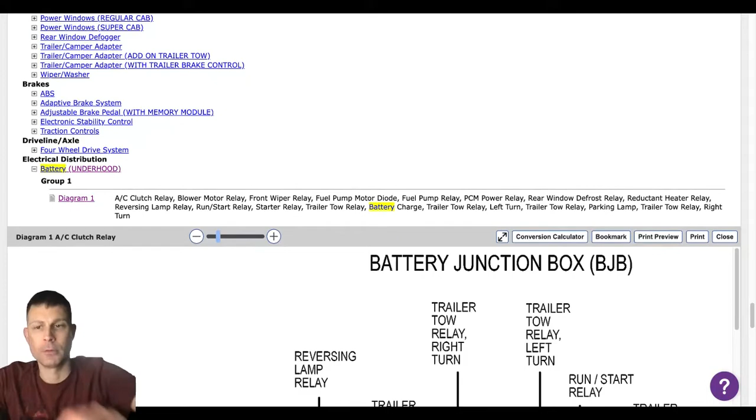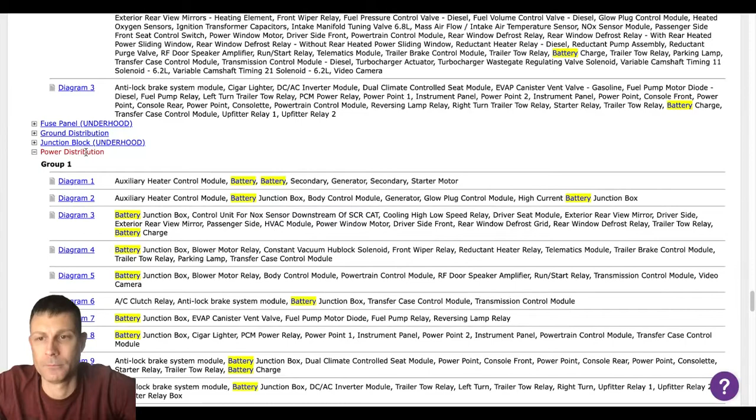This is a 2015 Ford F550 diesel turbocharged bus, and we just purchased new batteries for it.

All our dash lights are out. The horn works, and we've got the fuse box cover off, but we have no idea where to start with what to do at this point. So I wondered if you could give me some guidance, please.

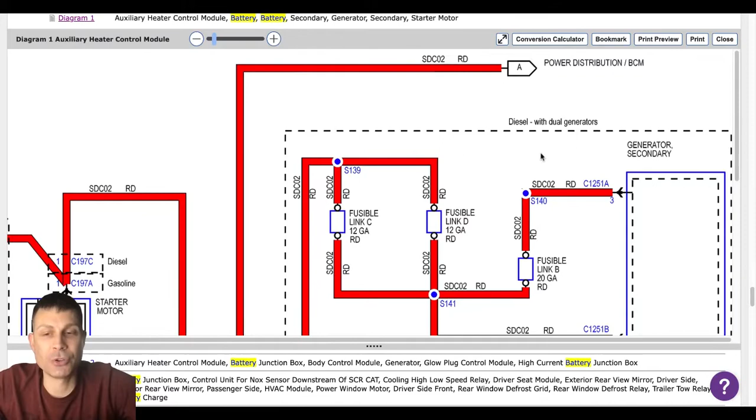Yeah, you bet, I'm definitely trying my best here. So the batteries are new, and you can access the fuses right now, correct?

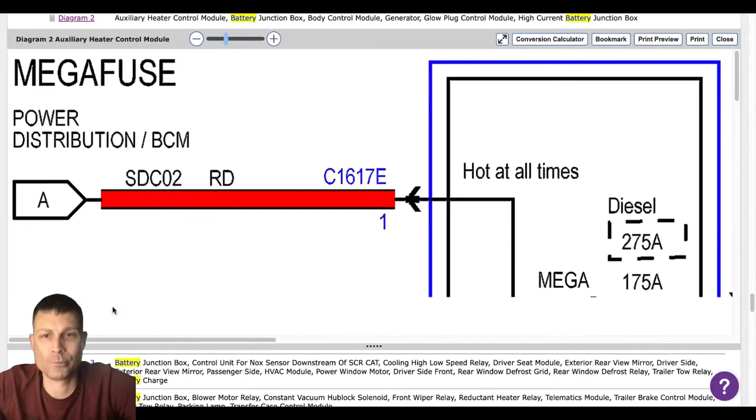We can access the fuses, and just to give you a heads up on what we've already attempted: this vehicle used to start if we'd come in, turn on the dash, there would be lights.

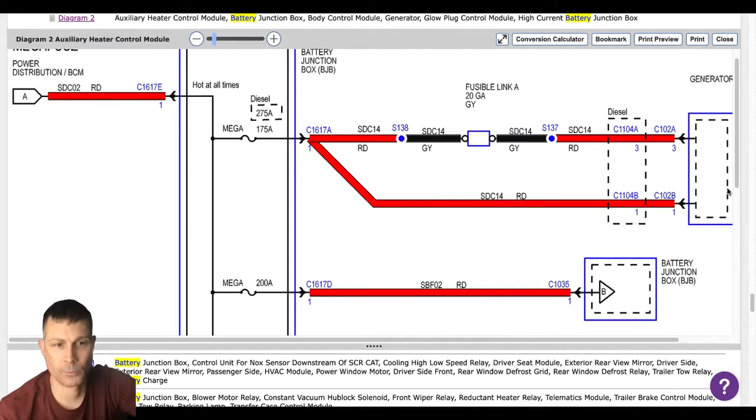And then we go underneath and jump over from the solenoid to the power, and we'd start it right up. Since a month or two ago, the lights did not come on the dash.

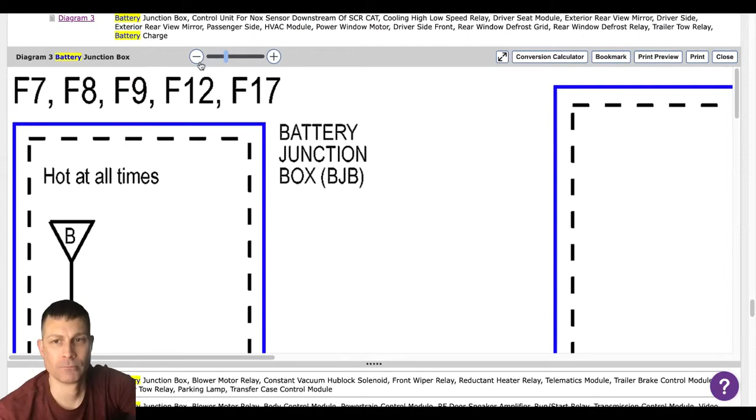And when we go down there to try to start it using the jump from the solenoid to the power, it just turns over but there's no firing.

So it's obvious that there seems to be some type of relay or something that's stopping power from even coming into the system to get the dash lights on or get the fuel pump on and all of that.

Right, where to look. So the first thing I would do is just make sure all the main fuses are good. Now if you've done that, if you've gone through all the fuses and they're good, then at that point...

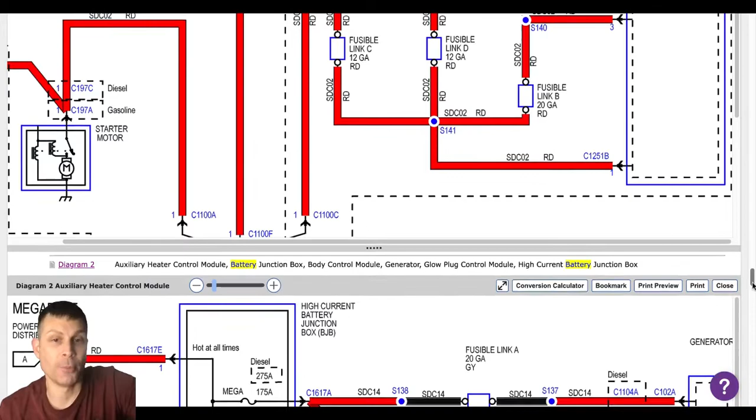We're going to need to take a voltmeter and make sure that all the main fuses have the same voltage as the batteries. So if the batteries are at like 12.6, then the main fuses should also have 12.6 volts.

Okay, so do you have access to a schematic? Yes sir, I do, that would give us... Okay, so can you tell us, like, what is the... Because to me, this appears...

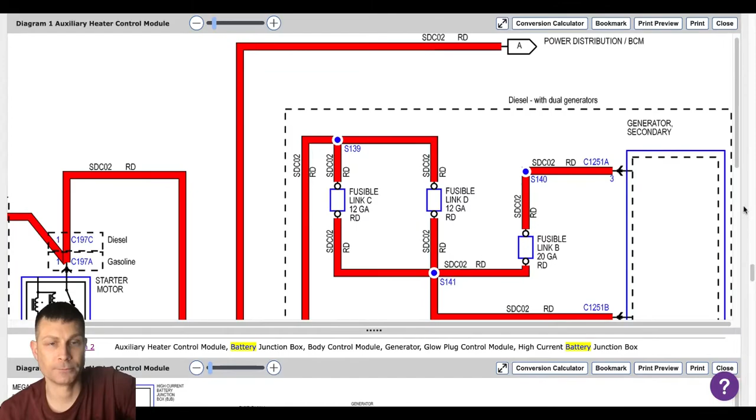Of course, I don't know, because as I say, our horn works. It's just that... so my logic would have been that if it was the main relay that goes into the fuse box, then it wouldn't even have a horn.

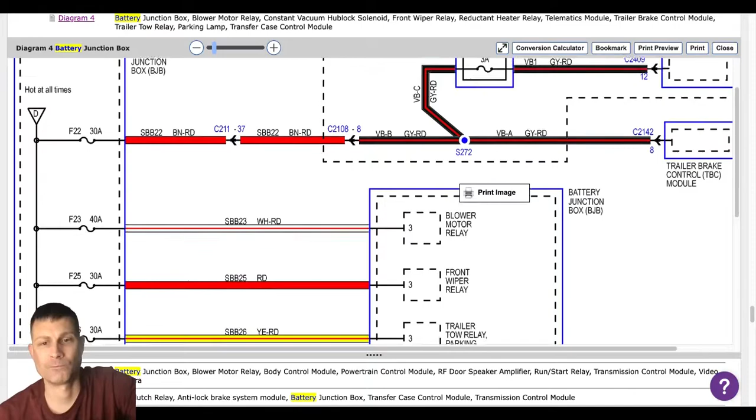Correct. So do we have a secondary thing that would be our first move? I don't have a multimeter, I left that one at the shop.

Is there any other option, or should I wait and go get that and call you back, or what do you think? Well, I'm sorry.

So you said you did go through the fuses, or did not? I apologize.

I got my guy looking at them all now. Do you see anything that looks... It's, of course, you know too that a number of the connections in the fuse box are not visible fuses that you can see.

They're actually relays, and those wouldn't obviously give us any indication of being good or bad, because you can't tell just from looking at it.

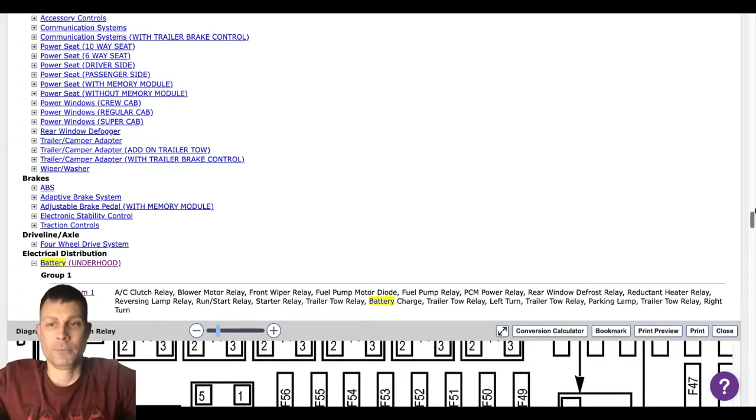Right, just worry about the fuses for now. Yeah, any fuse that you see that's got issues there? No. Okay, I have my helper with me.

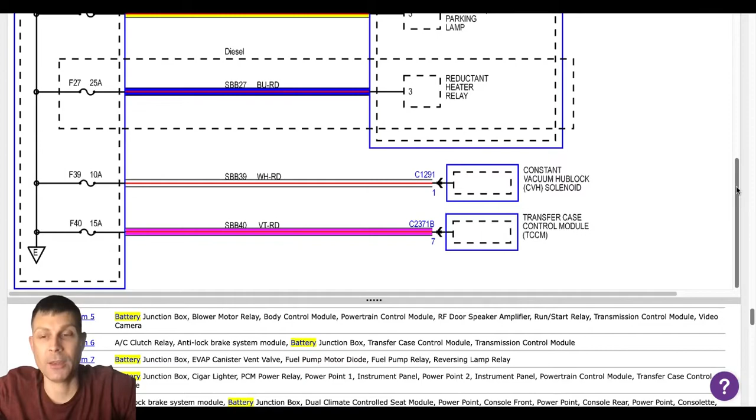Okay, no problem. So if all the fuses are good, then yeah, we're going to have to get ourselves a voltmeter at this point and go through and check power on the main fuses. From what I think, you have a high current battery junction box actually, then you have a regular battery junction box under the hood, and you might even have one inside the vehicle.

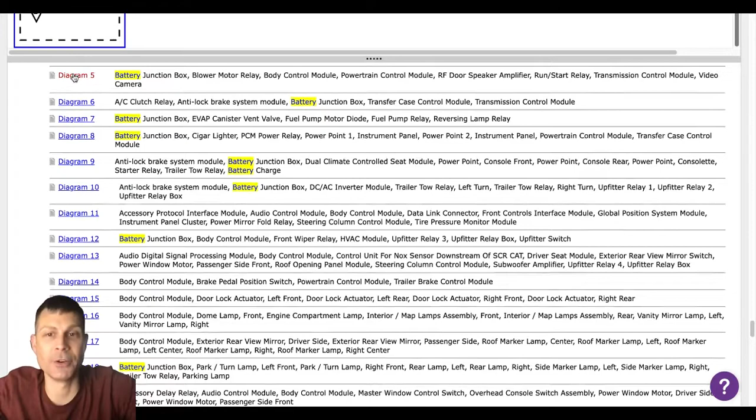I haven't seen it yet here going through the diagrams, but we would at least start with the fuse box, 2 fuse boxes under the hood, and my guess is we'll probably find something. That would be my guess.

Okay, so can you explain to me where the other high voltage fuse boxes would be in this particular one? We do have the one over on the driver's side that's closest to the firewall already opened up, but is there another fuse box that we're missing here that you could give me a heads up on where it would be located? Yes, sir. Absolutely. Sometimes they're right next to one of the batteries, but this is a diesel. We got 2 of them, so take a look here.

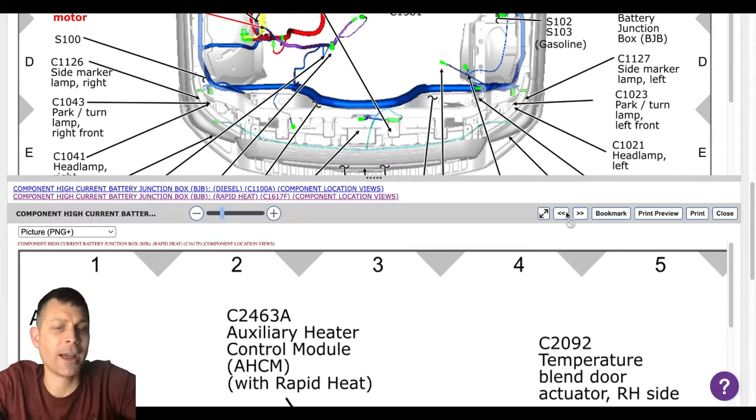Oh, we have 2 high voltage fuse boxes besides the regular fuse box? No, I think you just have one high current battery junction box, and then you have a regular battery junction box. There are 3 fuse boxes on this vehicle. The first one is the high current battery junction box. It is located near the battery on the passenger side. It contains all the high current fuses.

The second is the battery junction box. It is located on the driver's side near the fender. It contains fuses and most of the relays for the vehicle. The third is the body control module. It is located in the right kick panel in the cab of the vehicle. There we go. Sorry, go ahead. Okay, so we're obviously going to want to start with the high voltage fuse box on the passenger side under the hood. Yes, sir. Correct? Yes, sir.

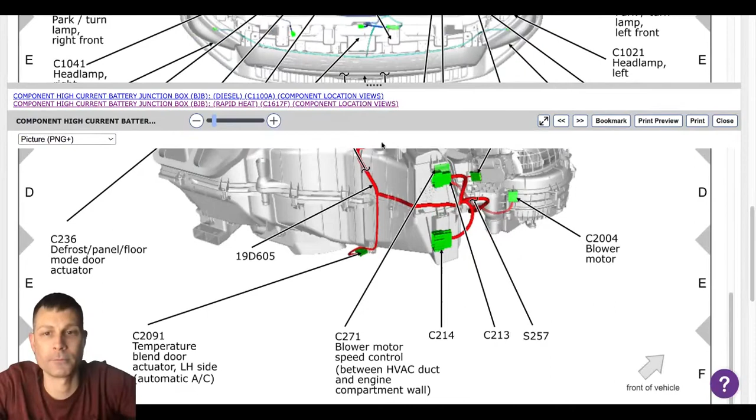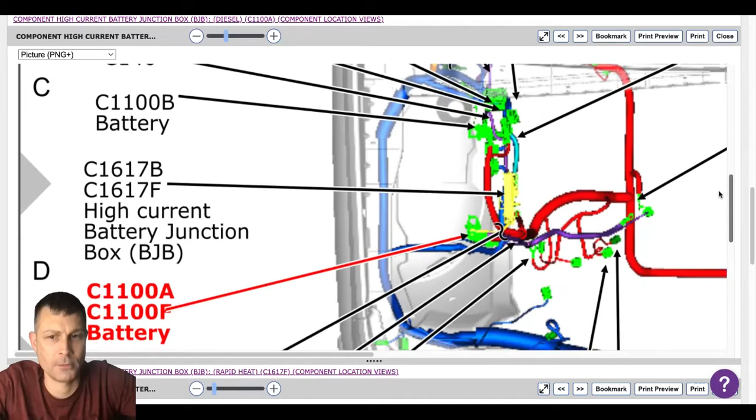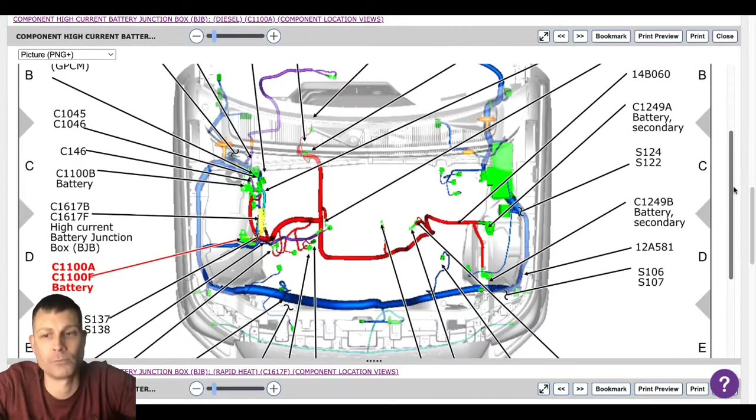Okay. All right. So we're just now pulling off that cover here. Trying to. A little bit tight. Okay, we've got that cover off. Does it look like an obvious check here? Okay, so it looks like there are 1, 2, 3, 4 different types of connections in here. Is that, or 5 actually? Does that sound like what you've seen? Yeah.

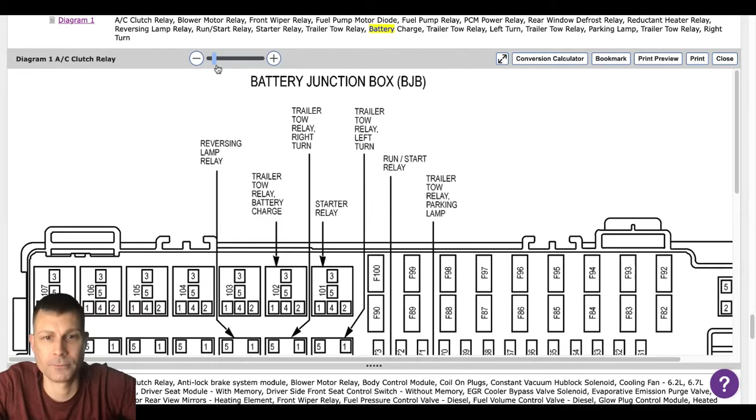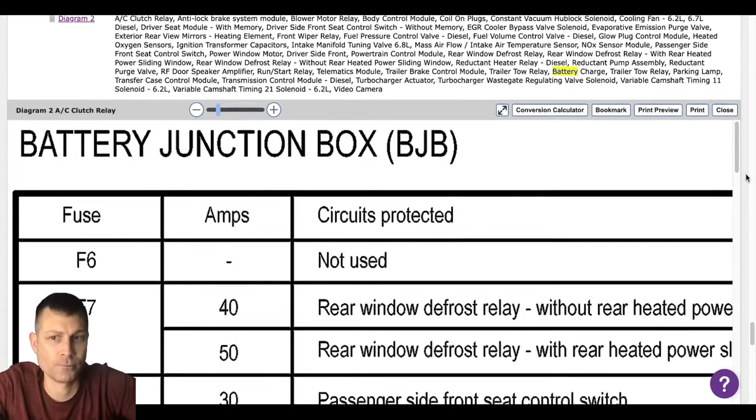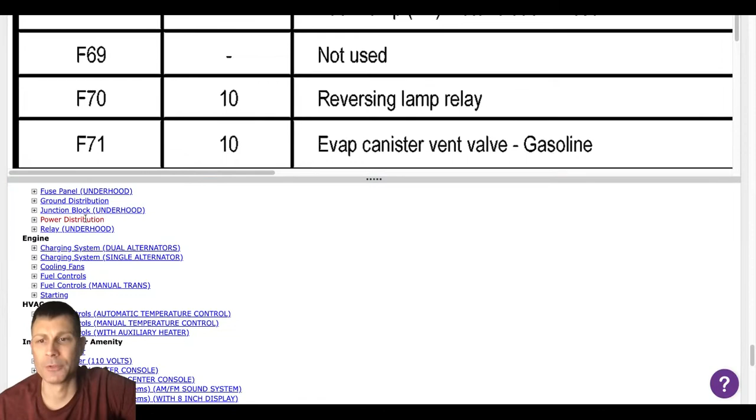Okay, so what we want to do, is there actually a breaker on this or a fuse? No, they're just high current fuses. And where would they be located at on this? So that would be in the high current junction box. Okay, but I mean, as far as the fuse itself, I think I can kind of see here, is there how many, 2 or 3? There's probably more than 2 or 3. Let me take a look here. I'm showing there's slots for 1, 2, 3, 4, up to 5. Now they may not all be filled, but I'm showing slots up to 5. Okay.

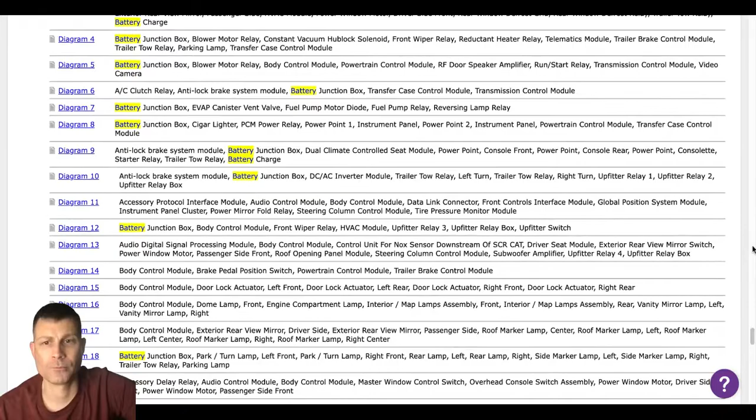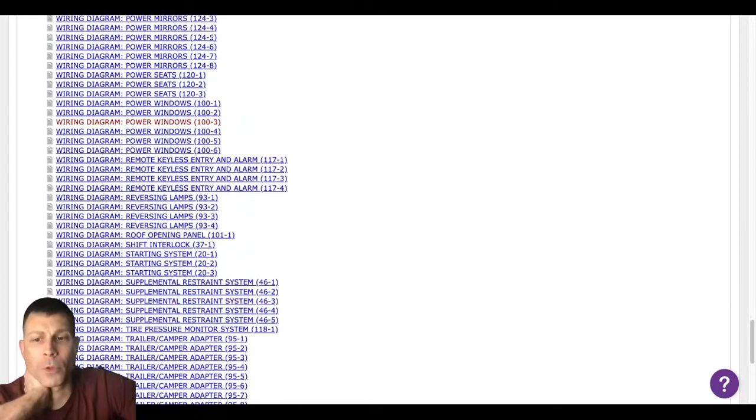This is a little bit questionable to me as far as how to even check these particular fuses. They're kind of a very unusual system. They're side mounted. So if they're regular fuses, even if they're not regular fuses, they still work the same. Okay, so if there's power in the fuse going in, but there's no power coming out, the fuse is bad, right? So right now we don't have a voltmeter, so we can't measure power in and out of the fuse. So that's going to be your next step.

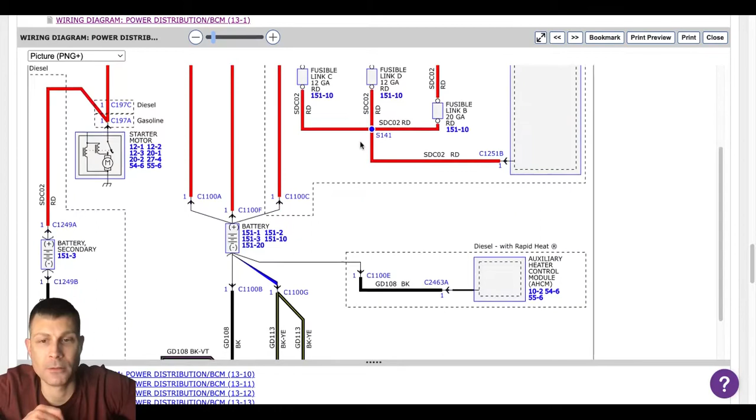Okay. All right. So then, okay. All right. Well, then what I'll do is I'll go ahead and get the voltmeter, and then I'll reply back to you that I'm ready with that voltmeter.